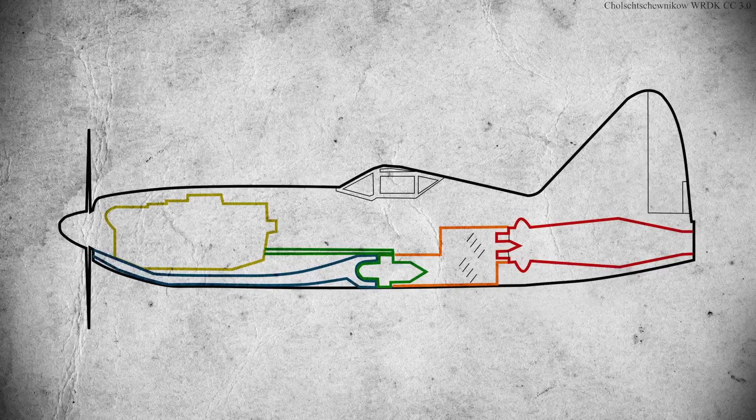While Coanda's claims are disputed, what is known is that his turbo propulsor was not a jet engine as we would recognize it today. Rather, it was a form of motor jet, in which a conventional piston engine drives a compressor to generate a high-speed air jet. In certain motor jet designs, fuel is injected into the jet and ignited to produce extra thrust, as in a modern afterburner. The first verified motor jet-powered aircraft to take to the skies was the Italian Caproni Campini N1, which made its maiden flight on August 27, 1940.

Yet despite its innovative power plant, the N1 was unable to outperform conventional propeller-powered aircraft of the era and suffered from unacceptably high fuel consumption and overheating. And while the Soviet Union also briefly experimented with motor jet-powered fighters like the Mikoyan-Gurevich I-250 and the Sukhoi Su-5, it soon became clear that motor jets were a technological dead end, and these unusual power plants soon became little more than a footnote in the history of aircraft propulsion.

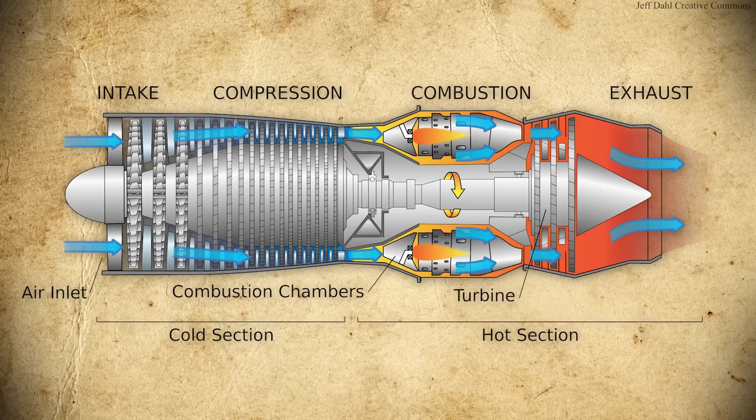A true jet engine, or turbojet, is, in principle at least, remarkably simple, consisting of just 4 basic components: a compressor, a combustion chamber, a turbine, and a nozzle. Air enters at the front of the engine, where it is compressed by the compressor before being fed into the combustion chamber. Here, the air is mixed with fuel and ignited, which creates hot, high-pressure exhaust. This exhaust is then passed through the turbine before being expelled out of the engine, generating forward thrust.

Meanwhile, the turbine extracts a small amount of energy from the exhaust and uses it via a connecting shaft to drive the compressor, making the whole cycle self-sustaining.

The first modern gas turbine was patented in 1791 by English inventor John Barber, who planned to use it to propel a horseless carriage. Similar devices were created in 1872 by Dr. F. Stolze and in 1903 by Aegidius Elling, the latter of which became the first successful self-sustaining gas turbine.

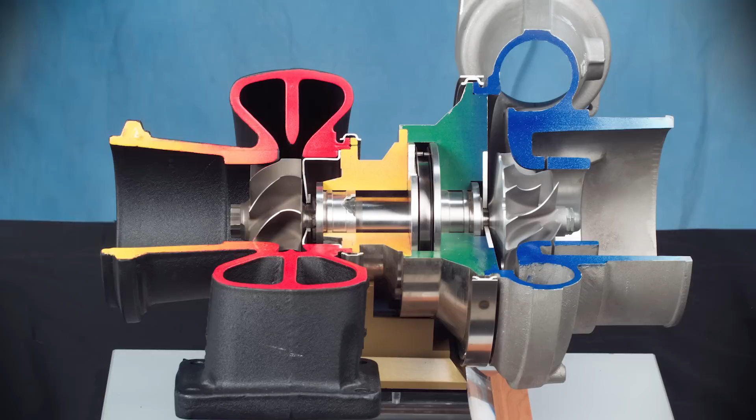In 1918, Dr. Sanford A. Moss of the American firm General Electric invented a two-stage turbine called the turbo-supercharger, or simply turbocharger, though this was not intended for powering vehicles directly. Rather, the turbocharger used waste energy from a conventional piston engine's exhaust to feed more air into the engine's intake manifold, increasing its power output.

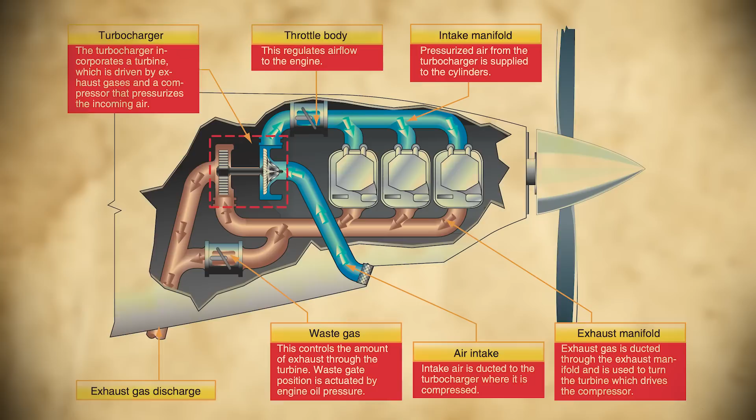Two decades later, this innovation would prove vital to the Allied strategic bombing campaigns over Western Europe and Japan. However, none of these early gas turbines were suited to use in aviation.

For the technology to become a truly viable form of propulsion, a number of different technical problems had to first be overcome, such as finding materials heat-resistant enough to prevent the turbine blades from distorting or the combustion chamber from burning through, while simultaneously being lightweight enough to mount in an aircraft.

Now, as we've covered many times on this channel, few truly groundbreaking innovations are the product of a single brilliant mind. Rather, they are developed over many years or even decades by dozens of hardworking and often overlooked individuals. But while the jet engine is no exception, it would likely not have been developed or adopted as early as it was were it not for the contributions of two key figures who both came up with the idea at around the same time and unwittingly found themselves in a high-stakes race to get their groundbreaking inventions into the air.

These extraordinary men were Sir Frank Whittle and Hans von Ohain.

Frank Whittle was born on June 1st, 1907 in Coventry, England, the eldest son of mechanic Moses Whittle and his wife Sarah Garlick. Fascinated by machines from an early age, Whittle learned about practical engineering by helping out in his father's workshop, and in 1923, at the age of 16, he signed up to join the Royal Air Force as an aircraft apprentice.

Unfortunately, he was rejected when his short height and slight build caused him to fail his medical examination. Determined to join up, he embarked on a regimen of intense physical exercise to bulk himself up and applied twice more, once under an assumed name, before finally being accepted.

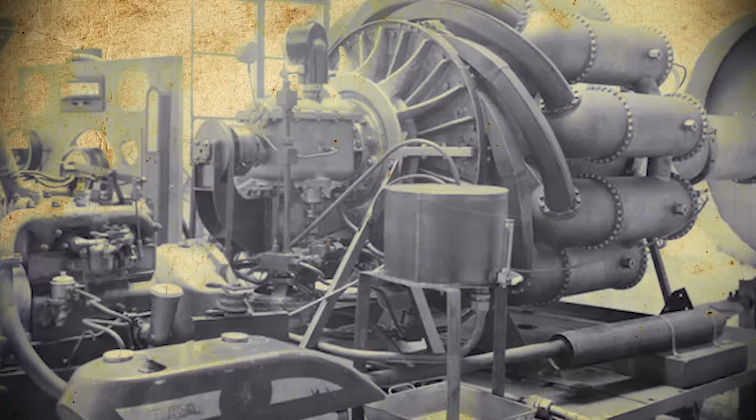After 2 years of work, the WU was finally ready for its first test run on April 12, 1937. Whittle later described the event: 'Immediately, with a rising scream, the engine began to accelerate out of control. I promptly shut the valve, but the uncontrolled acceleration continued. Everyone around me took to their heels, except me. I was paralyzed with fright and remained rooted to the spot.'

A few seconds later, however, the engine decelerated and came back under control. The problem, it was discovered, was a puddle of fuel which had gathered in the combustion chamber during a previous fuel pump test. Whittle installed a drain at the bottom of the chamber and tried again the following day, though this second test was no less hair-raising than the first.

To quote him again: 'This experience was more frightening than the first because local overheating had caused combustion chamber joints to leak, and the escaping fuel vapor took fire above the engine. Altogether, a petrifying situation, except for those who once more disappeared with record-breaking speed.' The quote ends. This time, the problem was found to be a faulty fuel valve.

This too was easily resolved, and after a few more successful tests, Whittle and his team were ready to demonstrate the engine for Dr. David R. Pye, Deputy Director of Scientific Research at the Air Ministry. The demonstration, which took place on June 30th, 1939, so impressed Pye that just weeks later, the Air Ministry awarded Power Jets a contract to produce a new engine designated the W1 for an experimental aircraft to be built by the Gloster Aircraft Company.

The aircraft, known as the Gloster E-28/39 Pioneer, was delivered to the airfield at Brockworth, Gloucestershire on April 7th, 1941. By now a fully qualified test pilot, Frank Whittle performed many of the initial taxi tests himself using a non-flight-worthy version of the W1 engine.

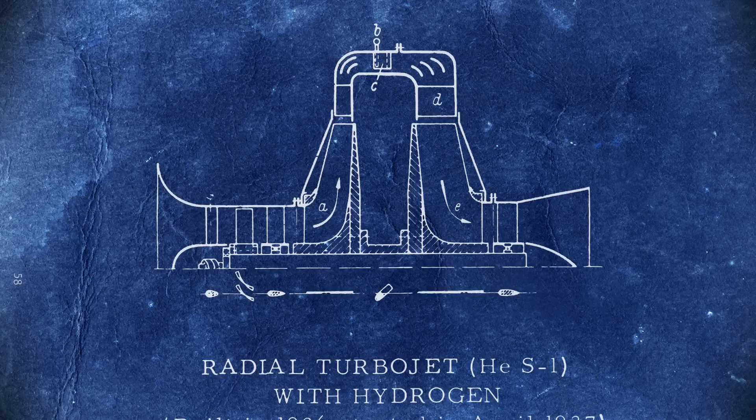By February 1937, von Ohain had assembled a new engine called the HES-1, fueled by hydrogen gas. Though the engine ran well, the hot-burning hydrogen quickly damaged the metal components. Von Ohain thus modified the design to run on kerosene, producing the more reliable HES-3, which could produce 4.9 kilonewtons of thrust.

To flight test the new engine, Ernst Heinkel tasked his two best engineers, Walter and Siegfried Günter, to design an experimental aircraft dubbed the HE-178. 7.6 meters long with 7.3 meter long elliptical wings mounted high on the fuselage and a conventional tail dragger undercarriage, the HE-178 was powered by a single HES-3 engine mounted behind the pilot, fed through an air inlet mounted on the nose.

The HE-178's maiden flight took place at Heinkel's Marienehe Aerodrome on August 27, 1939, just 5 days before Nazi Germany invaded Poland. Present on the field that day were several top officials from the Luftwaffe, including General Oberst Ernst Udet and General Feldmarschall Erhard Milch.

Ernst Heinkel later described the historic event.

He, test pilot Erich Warsitz, was flying. A new era had begun. The hideous wail of the engine was music to our ears. He circled again, smoothly and gracefully. The riggers began to wave like madmen. Calmly, he flew around once more, and when 6 minutes were up, he started to land. He cut out the jet unit, then misjudged the approach and had to sideslip. Sideslip with a new, dangerous and tricky plane. We held our breath, but the HE-178 landed perfectly, taxied and came to a stop. A magnificent landing. Within seconds, we had all rushed over to Warsitz and the plane. The riggers hoisted both of us onto their shoulders and carried us around, roaring with enthusiasm.

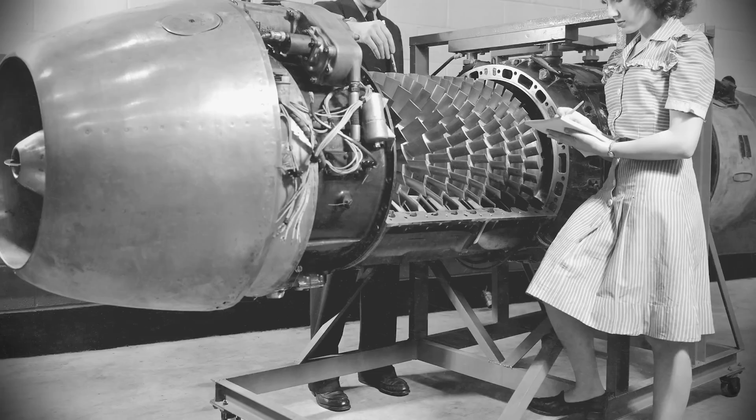In 1940, for example, designer Anselm Franz of rival aircraft manufacturer Junkers Flugzeug und Motorwerke developed the Jumo 004 engine, which used a more efficient axial flow compressor in place of von Ohain's centrifugal flow compressor. BMW and Brandenburgische Motorenwerke, or BRAMO, also developed similar engines, while the Reich Air Ministry, or RLM, secretly contracted Junkers, Messerschmitt, and others to manufacture their own jet fighters.

Despite being left out of this request, Heinkel proceeded with the development of a twin-engine jet fighter called the HE-280, which incorporated a number of key innovations, including tricycle landing gear and a pneumatically propelled ejection seat, the first in aviation history to save a pilot's life in an emergency. After lengthy delays caused by developmental difficulties with its intended engine, the HES-8, the HE-280 finally made its maiden flight on the 2nd of April 1941, becoming the world's first jet fighter to take to the skies.

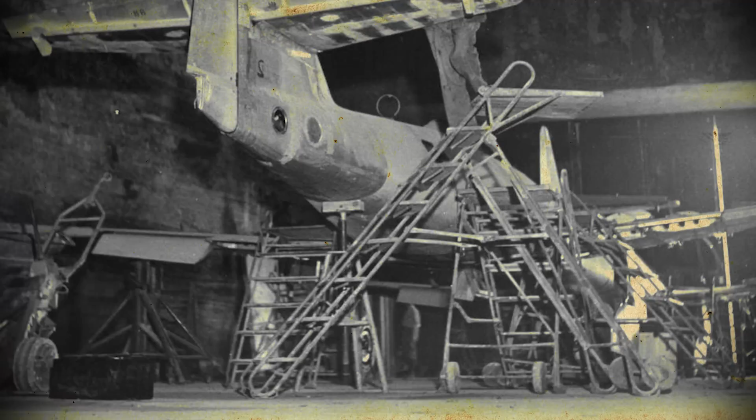Subsequent test flights proved the HE-280 to be a superbly swift and agile aircraft, easily outmaneuvering the Luftwaffe's best conventional fighter, the Focke-Wulf FW-190, in mock combat. Nonetheless, the RLM ultimately rejected the design, and a rival firm's Messerschmitt Me-262 Schwalbe became the world's first operational jet fighter, entering service in April 1944.

Thankfully for the Allies, several factors prevented the Me-262 from having a significant impact on the war. Chief among these was Adolf Hitler, who, believing Germany should always be on the offensive, ordered that the new jets be used for ground attack, a task for which they were ill-suited, rather than shooting down Allied bombers. And even when the Me-262 was deployed in its proper role as a fighter, technical and logistical problems prevented the aircraft from reaching its full potential.

The primitive metallurgy of the Junkers Jumo 004 engines gave them an extremely short lifespan, requiring them to be removed and overhauled after only a handful of flight hours, while Allied bombardment of factories frequently interrupted the production of new engines and spare parts. Worse still, chronic fuel shortages caused the Me-262 squadrons to spend most of their time on the ground.

Meanwhile, in Britain, Gloster developed its own jet fighter, the Gloster Meteor, powered by two of Frank Whittle's upgraded Power Jets W2 engines. First flown on March 5, 1943, the Meteor was the Allies' only operational jet fighter of the war, though it never saw combat against manned aircraft.

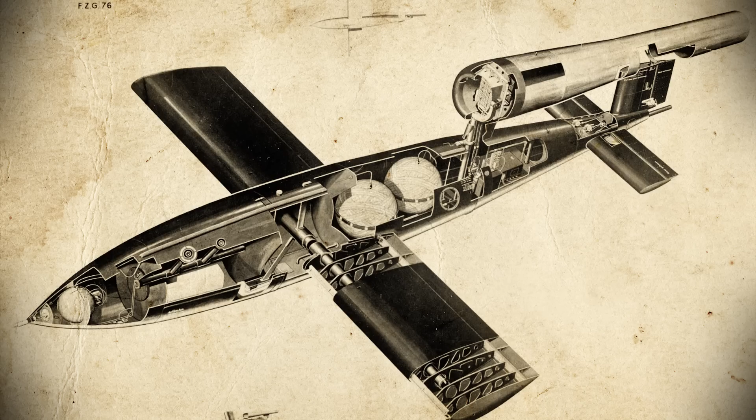Instead, its 970 km/h top speed made it invaluable for chasing down the German V-1 flying bombs that terrorized southern England between June 1944 and March 1945, with Meteor squadrons scoring 13 victories by the end of the war.

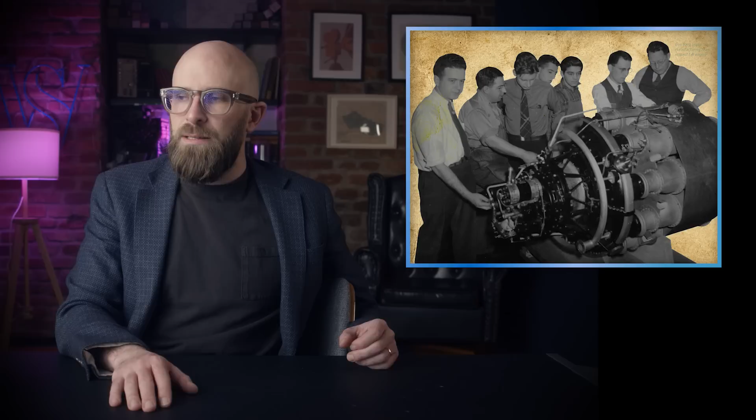Despite these difficulties, in March 1942, just 5 months after the project started, the GE engineers successfully bench-tested their redesigned engine, the I-A, producing 5.8 kilonewtons of thrust. The I-A was subsequently installed in an experimental fighter aircraft, the Bell Aircraft XP-59 Airacomet.

In keeping with the top-secret nature of the project, during ground handling, the XP-59 was fitted with a dummy propeller to disguise its true nature. The Airacomet made its maiden flight on October 2, 1942 at Muroc Airfield in California, today Edwards Air Force Base, with test pilot Colonel Laurence Craigie at the controls.

Unfortunately, the first American jet proved underpowered and never entered service, though GE would later refine its I-A engine into the J-31, the first jet engine to be mass-produced in the United States.

In 1945, the Lockheed P-80 Shooting Star became the United States' first operational jet fighter, serving with distinction in the Korean War alongside other early jets like the North American F-86 Sabre.

The commercial aviation market followed suit in 1952 with the introduction of the British de Havilland DH-106 Comet, the world's first jet airliner. Within just a few years, the age of piston-engined aircraft had finally come to an end. Jets now ruled the skies, making the globe just a little bit smaller with each passing year.

Of course, jet engines have come a long way since those early days, seeing dramatic improvements in thrust, fuel efficiency, and reliability. But, well, that's a story for another time, isn't it?